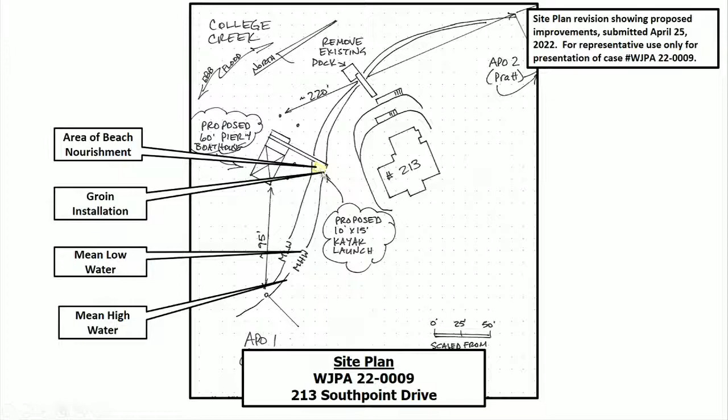This gives a better view. The house will be to the left. The area of beach nourishment is shown in the yellow area, steps down to the proposed pier, the kayak launch to the right, and then the sill installation above.

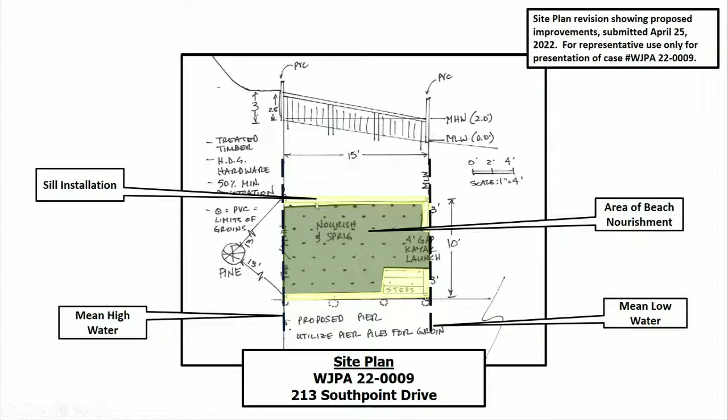Site photography looking down towards the area of work, the area of beach nourishment.

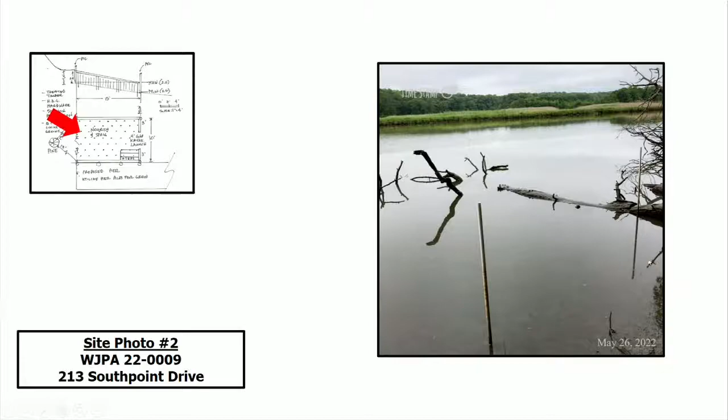As published in the Virginia Register on July 11, 2005, the revised Wetland Mitigation Compensation Policy and Supplemental Guidelines, Regulation 4 VAC 20-390-10, Virginia, as a Chesapeake Bay program partner, is committed to achieve a no net loss of existing wetlands acreage and function in the signatories' regulatory programs. In order for a proposed project to be authorized to impact wetlands and compensate for the wetland loss in some prescribed manner, the following 3 criteria must be met.

All reasonable mitigative efforts, including alternative siting, which would eliminate or minimize wetland loss or disturbance, must be incorporated into the proposal. The proposal must be clearly water dependent in nature, and the proposal must demonstrate clearly its need to be in the wetlands and its overwhelming public and private benefits. If the proposed project cannot meet one or more of the above criteria, the project must be denied or must occur in areas outside of the wetlands. Should it satisfy all 3 criteria, however, compensation for the wetland loss is required.

The sequence of acceptable mitigation options should be as follows: on-site, off-site within the same watershed, mitigation banks in the same watershed, or a payment of an in lieu fee. If compensation is required, it should be a condition of the permit.

Staff has reviewed this application and finds that this project meets the 3 criteria outlined above. There are no anticipated vegetated wetland impacts associated with this proposal, therefore mitigation is not a requirement of this permit. However, the applicant has already proposed the plantings of Spartina alterniflora as beach nourishment. Staff has reviewed the above application and recommends approval of the application as presented.

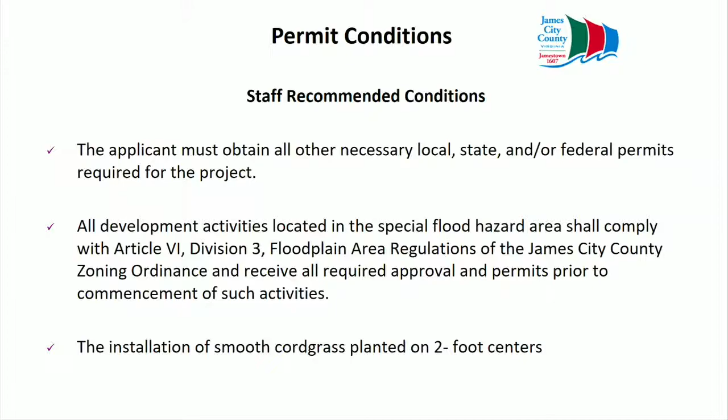The wetlands permit for this project shall expire on June 8th, 2025 if construction is not begun. If an extension of the permit is needed, a written request shall be submitted to the Stormwater and Resource Protection Division no later than April 27th, 2025, which is 6 weeks prior to the expiration date. If there are any questions, I'd be happy to answer them at this time.

I have a quick question. Could you restate, you said there was no vegetated impacts to the wetlands? Correct.

The application shows a proposed pier. I note that there is an existing pier. Are they just rebuilding the pier? Yes, one pier, the existing pier is going to be taken down and then a new pier built in this new position.

Questions for staff? Who is the contractor going to join us? Ms. Carla Havens? Who's the contractor? I do not know, sir.

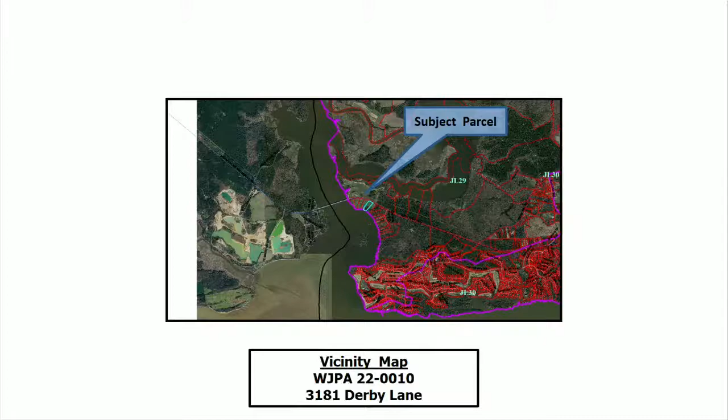Also existing on the property is a series of offshore breakwaters. The applicant is proposing an additional 12-foot by 55-foot breakwater landward of the most northern two breakwaters that will include approximately 3,600 square feet of beach nourishment and sprigging. This project is proposed between mean low water and mean high water. Therefore, this project must be heard by the Wetlands Board.

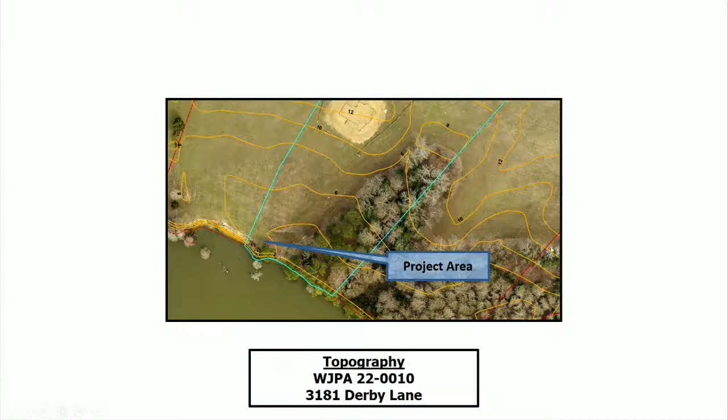A little bit of information about the site. Some topography for the proposed site and the floodplain. The site plan, as I was describing, this is the proposed breakwater. As you can see, there are a series of breakwaters existing on this site.

Area of rock is outlined here in yellow, with this square being the breakwater and the furthest one on your screen being the proposed revetment. The concrete wall that I was speaking of is just behind this proposed revetment. This concrete wall holds a patio area that is beginning to see structural failures.

In orange here is an area of beach nourishment. The contractor has agreed to sprig portions of the tombolo feature associated with the breakwater and leave areas as a natural or recreational styled beach as well. Mean high water is here in purple and in blue on this side of the breakwater system.

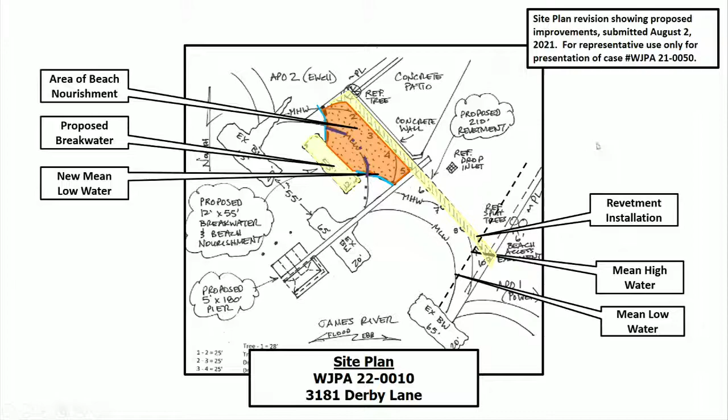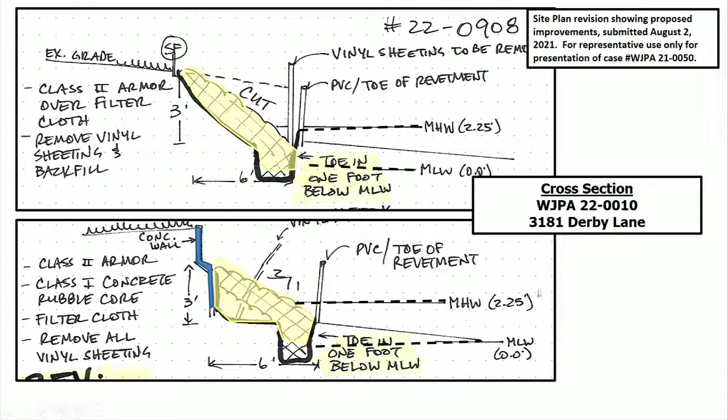In the area where the concrete wall nearly interfaces the existing vinyl bulkhead area, the revetment will come all the way up to the concrete wall. Here's a cross section of the proposed breakwater, and in yellow, and in green, the area of beach nourishment and sprigging.

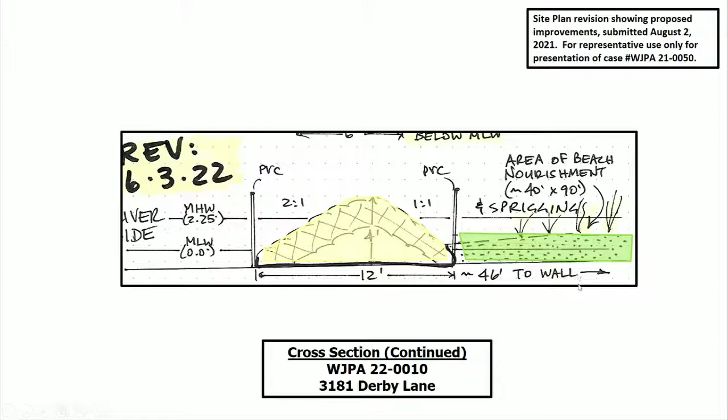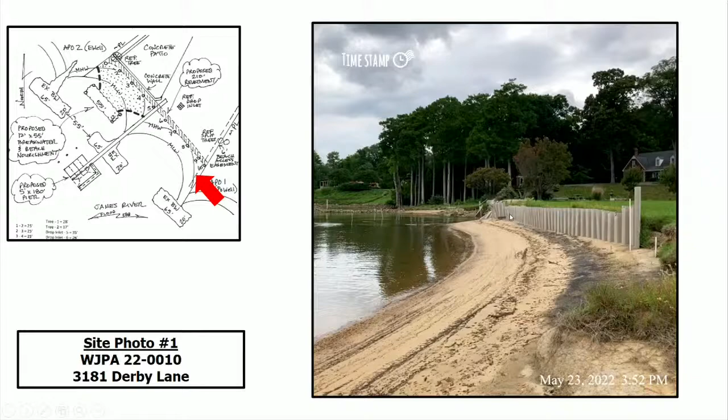A couple of site photographs. This is the existing bulkhead or vinyl wall. In this area, you can see where it is beginning to fail. A look out towards the existing two breakwaters.

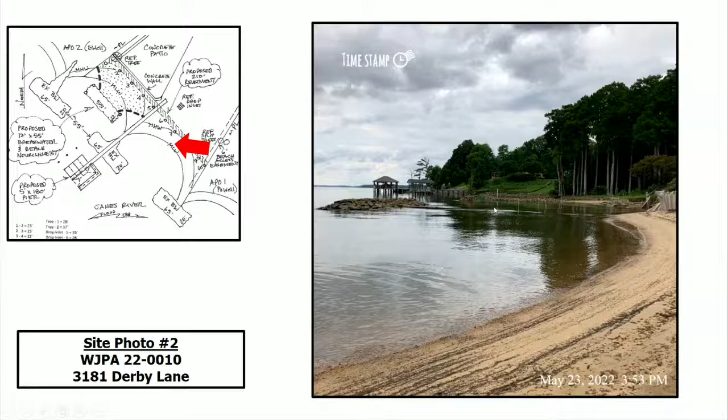This one is a little bit hard to see, but the new breakwater is proposed inland of the two, but in between the northernmost breakwaters. This is the area of revetment. As you can see, this portion of the property is experiencing upland erosion or shoreline erosion here. It's cutting in back behind the vinyl bulkhead and to adjacent property owners.

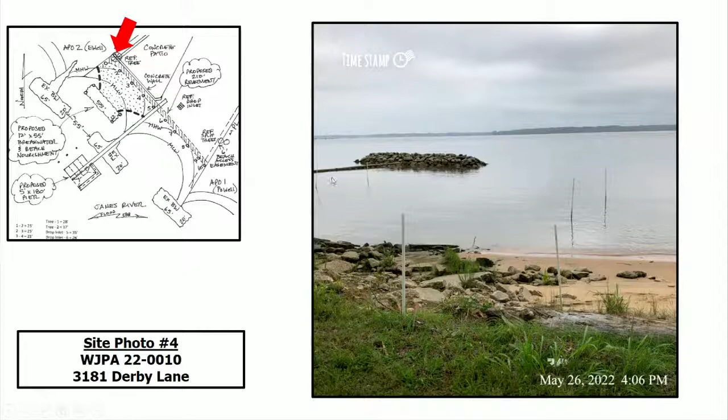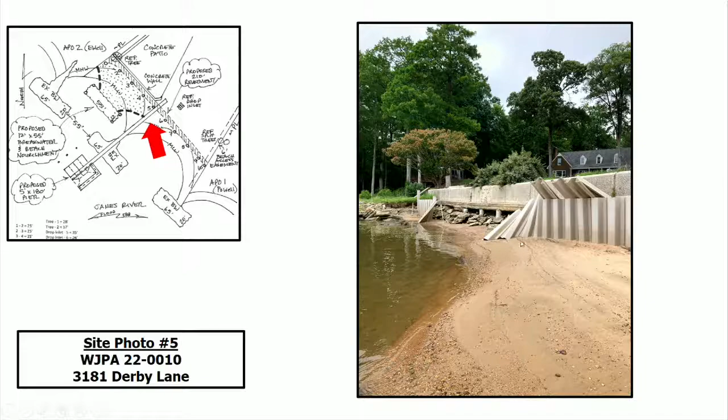Looking out, this is the area, these PVC pipes would represent the new breakwater. And the area in between these four would be where the beach nourishment will go with some sprigging. A good shot of the failure of the vinyl bulkhead and its exposure to the concrete wall behind it. There's a decently significant amount of threat to that concrete wall due to this erosion issue.

As published in the Virginia Register on July 11th, 2005, the revised Wetland Mitigation Compensation Policy and Supplemental Guidelines, Regulation 4 VAC 20-390-10. Virginia, as a Chesapeake Bay program partner, is committed to achieve a no net loss of existing wetlands acreage and function in the program and in the signatories' regulatory programs.

In order for a proposed project to be authorized to impact wetlands and compensate for the wetland loss in some prescribed manner, the following three criteria must be met. All reasonable mitigative efforts, including alternative siting which would eliminate or minimize wetland loss or disturbance, must be incorporated in the proposal. The proposal must clearly be water dependent in nature, and the proposal must demonstrate clearly its need to be in the wetlands and its overriding public and private benefits.

If the proposed project cannot meet one or more of the above criteria, the project must be denied or must occur in areas outside of the wetlands. Should it satisfy all three criteria, however, compensation for the wetland loss is required. The sequence of acceptable mitigation options should be as follows: on-site, off-site within the same watershed, mitigation banks in the same watershed, or a payment of an in lieu fee.

If compensation is required, it should be a condition of this permit. Staff has reviewed the application and finds that this project meets the 3 criteria outlined above. There are no anticipated vegetated wetland impacts associated with this proposal, therefore, mitigation is not a requirement of this permit. However, the applicant has proposed to revegetate the area of beach nourishment associated with the Tombolo feature with wetland plantings.

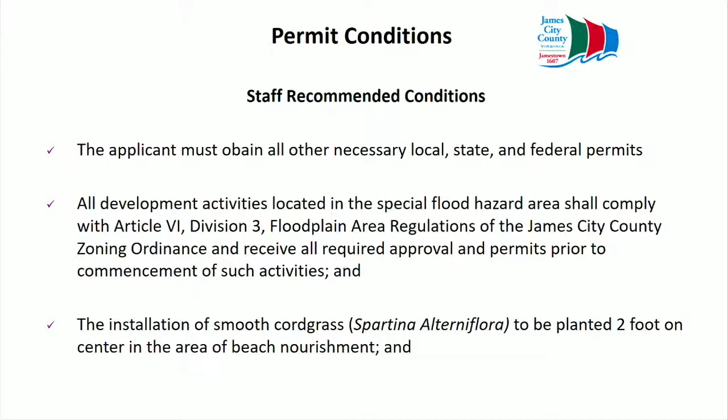That all development activities located in the special flood hazard area shall comply with Article 6, Division 3 floodplain area regulations of the James City County zoning ordinance and receive all required approval and permits prior to the commencement of such activities. That the installation of smooth cordgrass, Spartina alterniflora, or an equivalent wetland species be planted on 2-foot centers in the area of beach nourishment.

A surety of $300 be paid in place prior to the commencement of work in a form acceptable to the James City County Attorney's Office to guarantee the beach nourishment plantings. That this wetlands permit for the project shall expire on June 8th, 2025 if construction has not begun, and that if an extension of the permit is needed, a written request shall be submitted to the Stormwater and Resource Protection Division no later than April 27th, 2025, which is 6 weeks prior to the expiration date.

Thank you. Be happy to answer any questions the board may have.

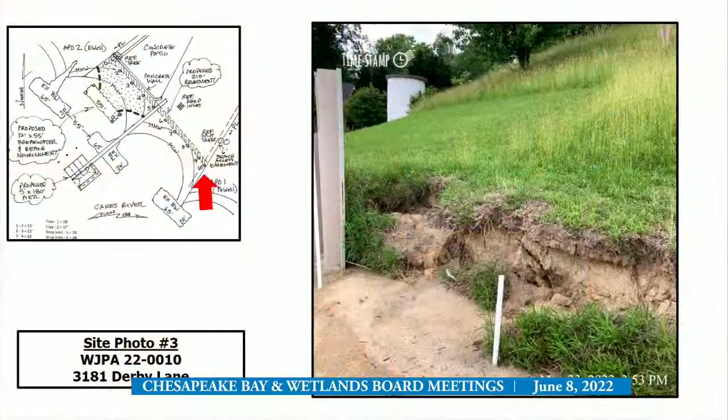Right now, the access is behind the bulkhead. I don't know if any of the residents are using it, because you can't use it — it's 4 feet high. So we have addressed it.

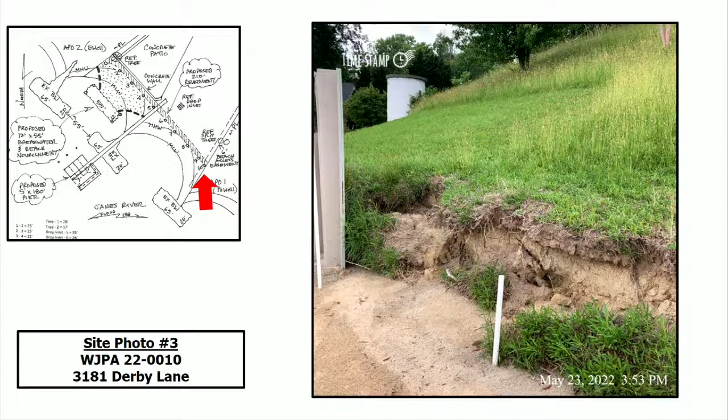I have staked it. I emailed the Ruggles, I emailed the Ewells, and I emailed the Powells. Those were the people at the group powwow we had on site, and I've not heard back from anybody. As far as I know, the Ruggles have not withdrawn their objection, but better access will be provided for the neighborhood clearly than what is out there right now.

So the intent of your plan is to maintain access for the local community? Yes, that is it — a 6-foot wide easement, and it will be worked into the 2-to-1 slope.

Instead of just placing the stones, we'll use flatter stones to make stairs. So it will still act as a revetment, but people will be able to step and walk down it like a set of steps.

Because right now, they're either going around the edge there, a 3-foot drop, or they're clambering over the vinyl bulkhead that has no cap on it and tearing themselves up.

Okay. And Mr. Kaisen has said he has welcomed the neighborhood to use his driveway. It's a much more hospitable way to get to the beach.

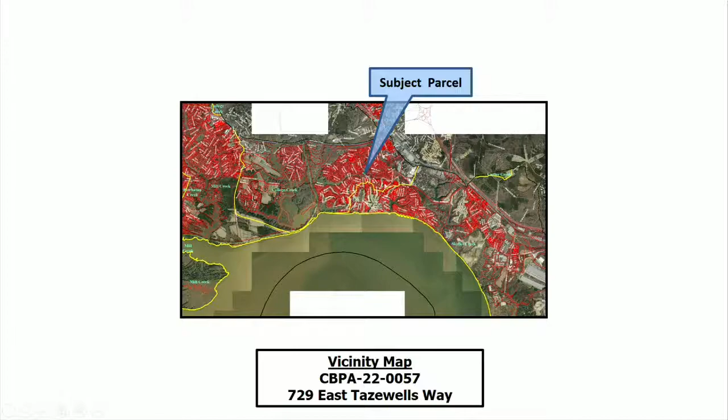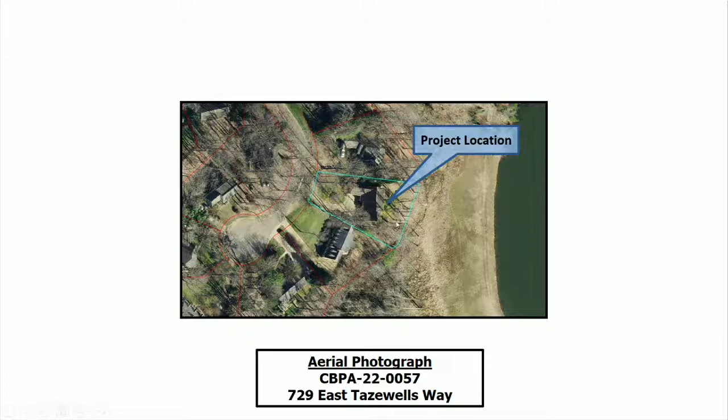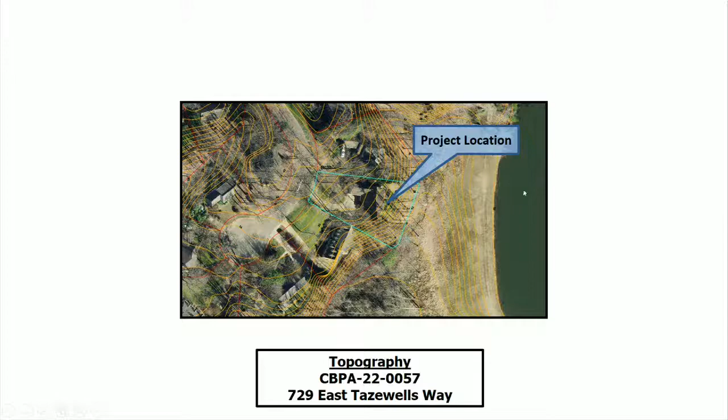An aerial photograph of the lot in question shows the deck being constructed to the rear of the property, and the topography of this lot. This ravine here will come into play in the next slide, where you see the floodplain, but more importantly, the resource protection area. There is a perennial body of wetlands coming through here, causing the resource protection area to encroach into the lot as heavily as it does.

The total lot size of this property is 0.43 acres, of which 65% is located within the resource protection area. On May 31st, staff from the James City County Stormwater and Resource Protection Division made a site visit to the applicant's home and found the proposed 793 square foot deck was already constructed prior to the approval of the Chesapeake Bay Preservation Waiver and a building permit. The existing deck includes 333 square feet of impacts to the landward 50-foot RPA and 460 square feet of impacts to the seaward 50-foot RPA.

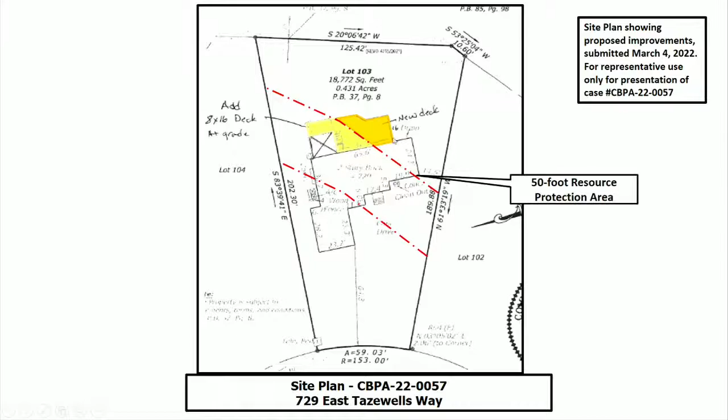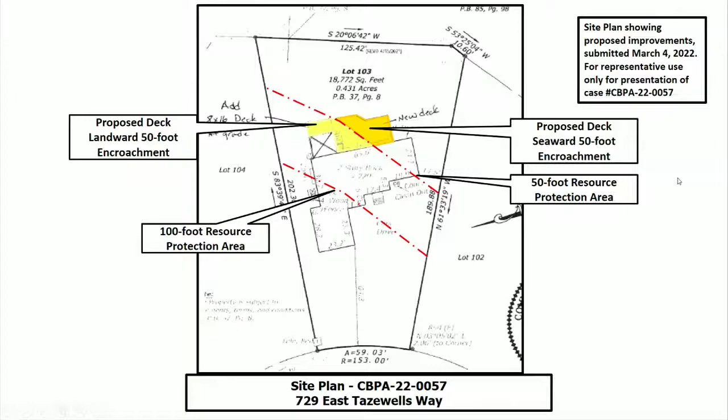On the site plan above, you can see the seaward RPA line and the 100-foot resource protection area. The two areas of impact are broken up into slightly different colors. The brighter area of yellow is the deck encroachments into the landward 50-foot RPA, and the deck encroachments into the seaward 50-foot RPA.

Should this exception request be approved, required mitigation for this amount of impervious impacts shall be doubled, equating to 4 planting units, which is 4 canopy trees, 8 understory trees, and 12 shrubs. Additional requirements associated with the after-the-fact exception request approval would include the payment of a surety that would correspond to this amount of mitigation, an additional permit fee of $300, mimicking the normal after-the-fact process, and an additional civil charge payment of $4,500 be paid prior to the issuance of a building permit.

Because this was constructed sometime between the application of the Chesapeake Bay Preservation Waiver and before its approval, the county deemed the degree of noncompliance to be in the major category. However, the water quality impact was deemed moderate based on violations we have experienced in the past. That is how we landed on this $4,500 civil charge.

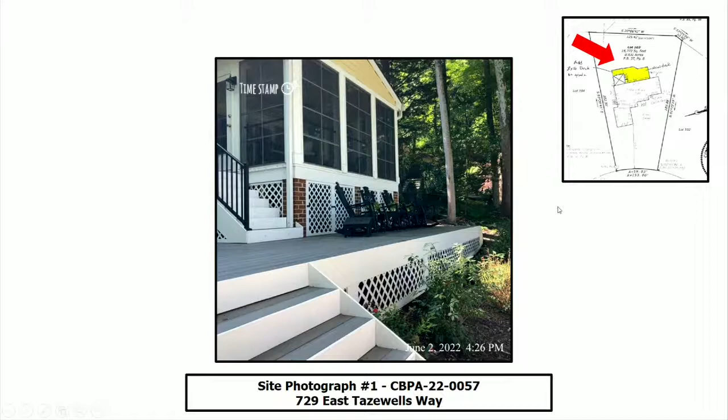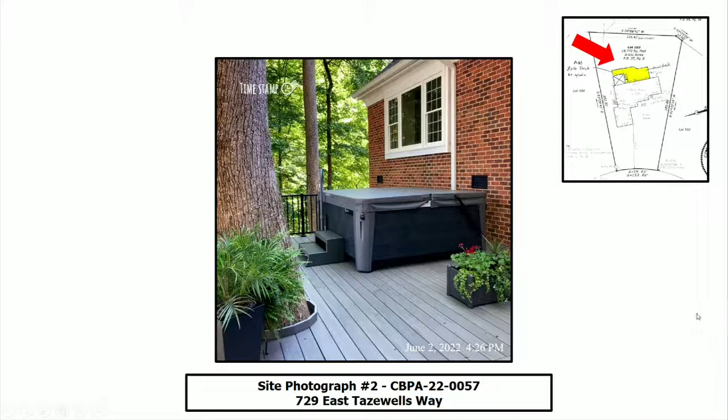Some site photographs of this deck. This is looking backwards towards the sunroom area. Standing on the deck, looking towards the opposite side. The deck and stairs, and the gravel underneath this deck, which would be a condition of this permit, which the applicant and contractor have already gone ahead and taken care of.

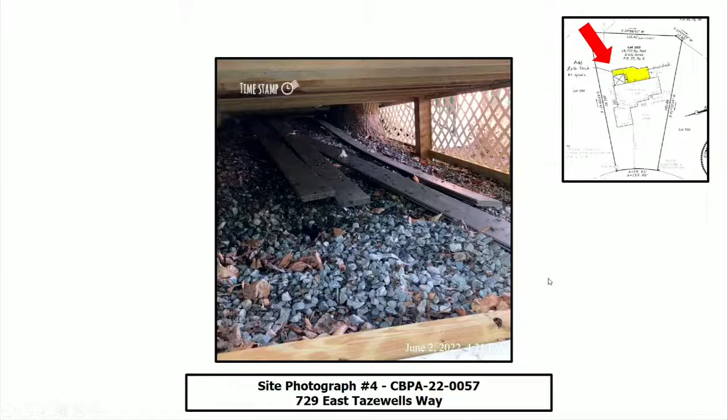Mitigation plantings that are already in place in some form or fashion. Over the past couple of years, it sounds like the homeowners have taken it upon themselves to revegetate the resource protection area, and staff will take that into consideration in some form or fashion.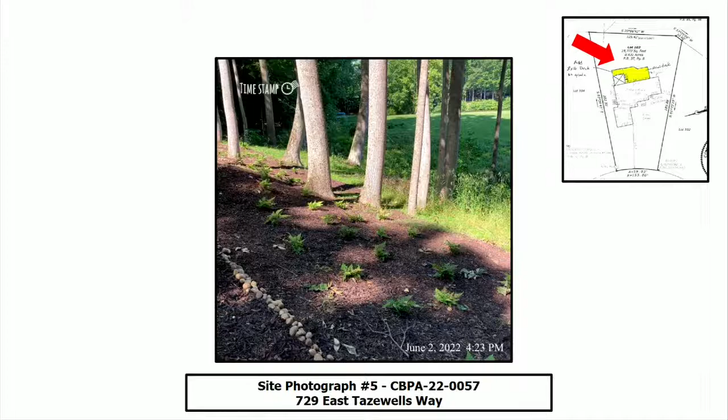Staff has evaluated the application and exception request for the construction of a deck. This application meets the ordinance conditions in sections 23-11 and 23-14 and should be heard by the board because the construction of a deck is considered accessory in nature. This exception request is also being heard by the board after the construction of this project.

The board may grant exceptions to section 23-7 if the application meets the following 5 conditions. The exception request is the minimum necessary to afford relief. Granting the exception will not confer upon the applicants any special privileges denied by Chapter 23, Chesapeake Bay Preservation of the James City County Code, to other property owners similarly situated in the vicinity. The exception request will be in harmony with the purpose and intent of Chapter 23 of the James City County Code and is not of substantial detriment to water quality.

That the exception request is not based on conditions or circumstances that are self-created or self-imposed, nor does the request arise from conditions or circumstances either permitted or non-conforming that are related to adjacent parcels. That reasonable and appropriate conditions are imposed which will prevent the exception request from causing a degradation of water quality.

Staff has reviewed the application and exception request and has determined the impacts associated with the proposal to be major for the proposed development. Staff recommends denial of this exception request and removal of the deck.

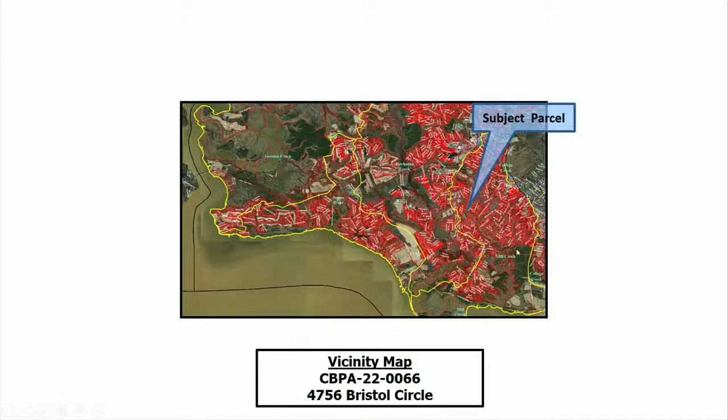Our next case is CBPA 22-0066, 4756 Bristol Circle. Good afternoon, Mr. Chair, members of the board. Robin Benedict, Watershed Planner. Mr. Michael Mann has applied for a Chesapeake Bay exception for encroachments into the RPA buffer for construction of a retaining wall located at 4756 Bristol Circle within the Westray Downs subdivision and the Mill Creek watershed. You can see the parcel in blue underneath this arrow and the Mill Creek watershed outlined in yellow. Here is aerial photography of the site, the project location at the front of the existing house, and topography at the site. The total lot size of this property is 0.48 acres, of which 98% is located within the RPA, so all but a sliver at the front of the property is RPA.

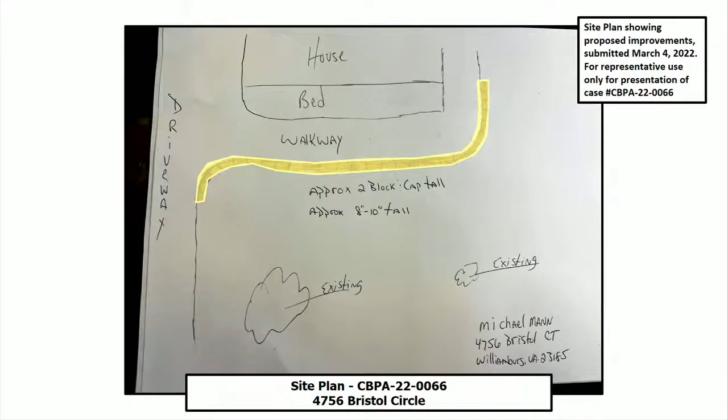The applicant is proposing to construct a retaining wall at the front of the house to help control erosion on the property. Total impacts to the RPA associated with this proposal equate to 52 square feet of impacts to the landward 50-foot RPA. Required mitigation for this amount of impervious impacts equals 3 shrubs. Here is the proposed site plan showing the existing walkway in front of the house and the proposed retaining wall. To put it in better perspective, here is the GIS overlay with the 50-foot resource protection area going right into the front of the house, the proposed retaining wall just in front of that, and the 100-foot resource protection area at the front of the house.

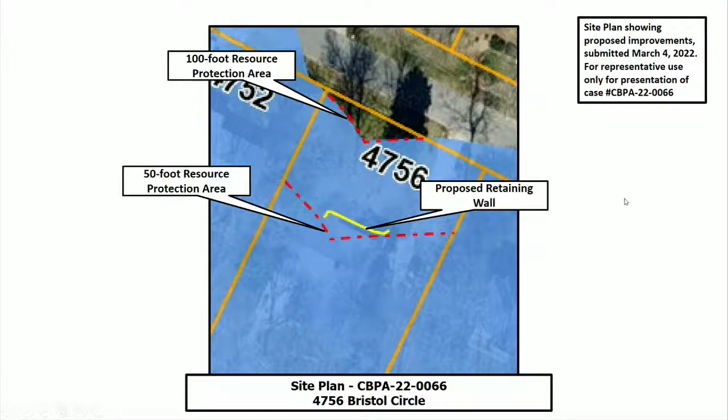Existing site photographs. In front of the walkway, currently there are a couple bricks, but that is the basic footprint of the proposed retaining wall. It loops back around towards the stairs at the front of the house, and it will continue down towards the driveway.

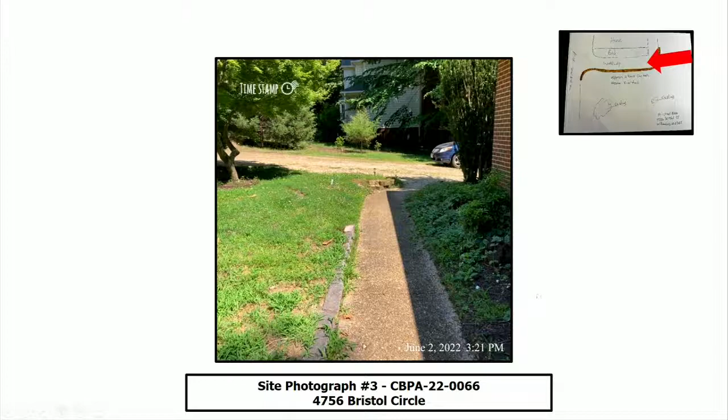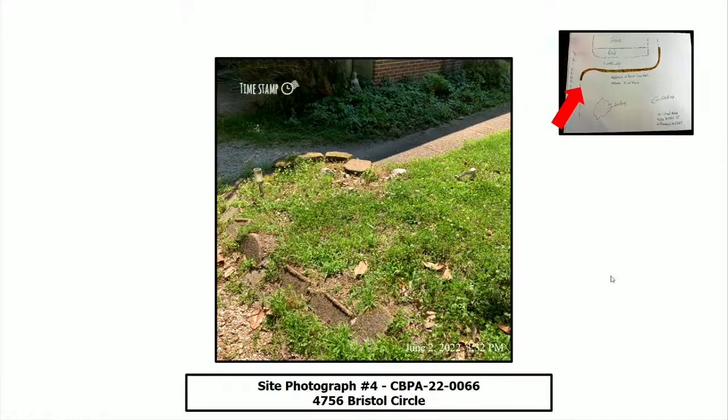This little knoll at the edge of the driveway will be straightened out and then curved back, so they'll lose this little bit of land. They say it's a bit of a safety hazard as it currently stands against that walkway. And here's the current condition of their front yard.

Staff has evaluated the application and exception request for the construction of a retaining wall. This application meets the ordinance conditions in sections 23-11 and 23-14 and should be heard by the board because the construction of a retaining wall is considered accessory in nature.

The board may grant exceptions to Section 23-7 if the application meets the following 5 conditions. The exception request is the minimum necessary to afford relief. Granting the exception will not confer upon the applicant any special privileges denied by Chapter 23, Chesapeake Bay Preservation, of the James City County Code to other property owners similarly situated in the vicinity.

The exception request will be in harmony with the purpose and intent of Chapter 23 of the James City County Code and is not of substantial detriment to water quality. The exception request is not based on conditions or circumstances that are self-created or self-imposed, nor does the request arise from conditions or circumstances either permitted or non-conforming that are related to adjacent parcels, and reasonable and appropriate conditions are imposed which will prevent the exception request from causing a degradation of water quality.

Staff has reviewed the application and exception request and has determined the impacts associated with the proposal to be minor for the proposed development. Staff recommends approval for this exception request, and if the board wishes to approve this request, staff recommends that the following conditions be incorporated into the approval.

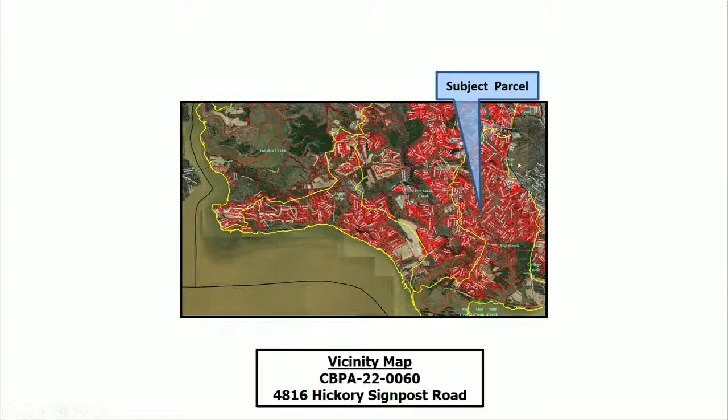You can see this property outlined here in blue. Again, the watershed boundary is here in yellow, and that is the Mill Creek Watershed. This parcel was platted in 1970 prior to the adoption of the Chesapeake Bay Preservation Ordinance in 1990. An aerial photograph of this property is outlined here in blue. The road runs, it curves around this property. So this property is the bend in Hickory Signpost with the wetlands running through and around this property as well.

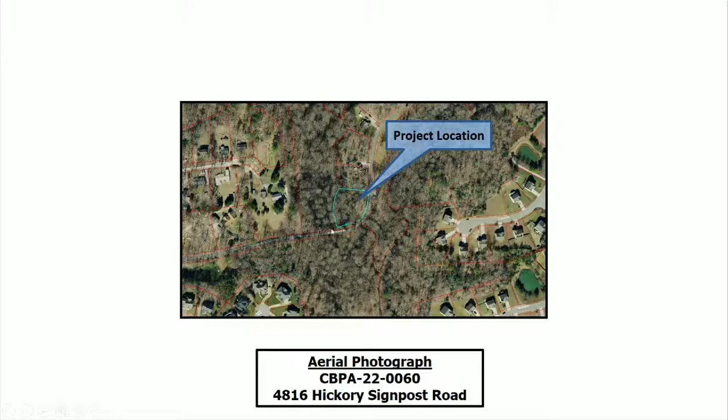The topography as this area is situated is very, very steep, dropping off to the actual wetlands. The wetlands themselves are very flat, very characteristic of streams with floodplain adjacent wetlands on them. And it's because of these wetlands that the resource protection area sits as it does on this lot. The total lot size of this property is 0.56 acres, of which 100% is located within the RPA.

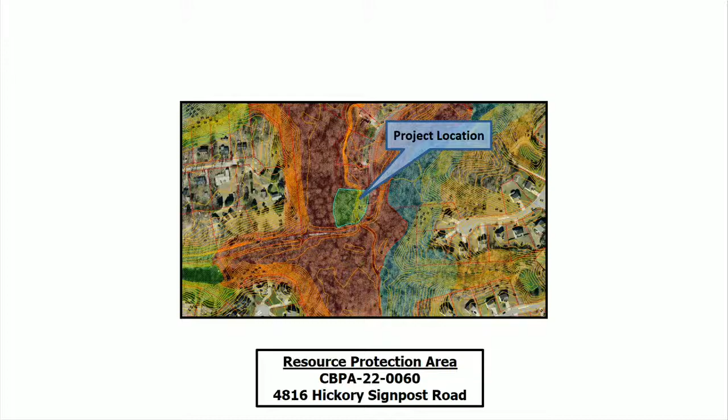The applicants gained approval from the Board of Zoning Appeals in May 2022 to move the building setback from 60 feet from the road to 30 feet, in an effort to move the dwelling farther from the wetlands. If this approval had not occurred, the house itself would more than likely be constructed within the wetlands.

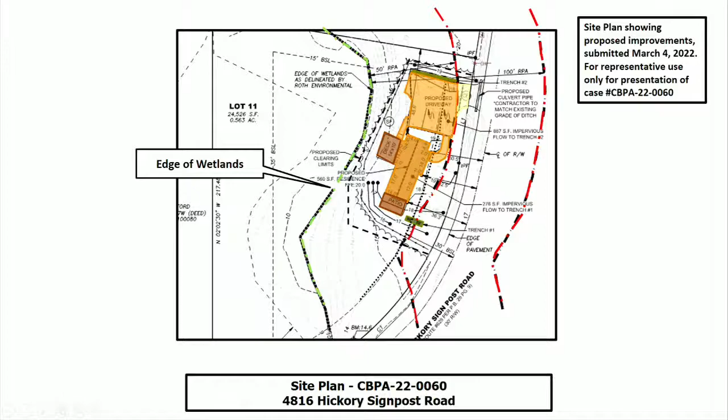On the site plan above, you can see these wetlands outlined here in green. The limits of clearing are this dash lined here. The 50-foot resource protection area here in red, and the 100 further out into the road. Seaward 50-foot house encroachments are outlined here in orange, and the accessory structures outlined here in the darker brown.

The proposed driveway encroachments that occur into the seaward 50-foot include 2 walkways that are coupled in with this number. And in yellow, you see the area that is outside or within the landward 50-foot RPA. So the majority of this lot is within the seaward 50-foot RPA, making pulling it out very, very difficult. The applicant has also included 2 infiltration BMPs to capture water quality and treat the runoff.

As I was saying before, this is the new 30-foot setback that is on this lot.

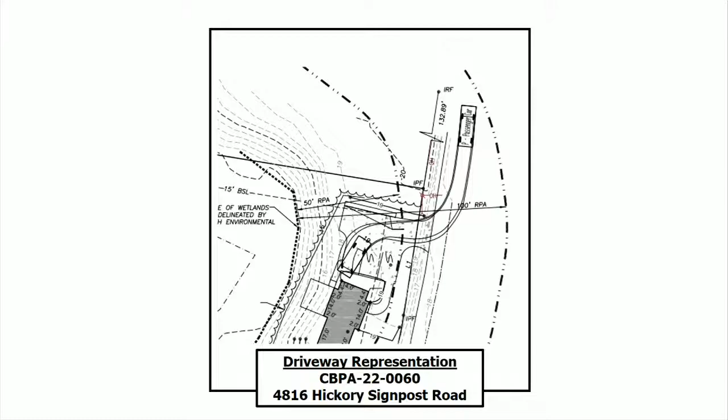The contractor also requested that we show this diagram regarding the size of the driveway. It is a large driveway, and there is no street parking due to the size of the road on Hickory Signpost. This is a diagram showing reasons why the driveway needs to be the size it is, in the words of the contractor, and a house diagram from the contractor as well.

Required mitigation for this amount of impervious impacts equates to 5 planting units, which is 5 canopy trees, 10 understory trees, and 15 shrubs. The applicant has verbally agreed to this and also proposed 2 additional infiltration BMPs on site. Staff has evaluated the application and exception request for the construction of a single-family dwelling.

This application meets the ordinance conditions in sections 23-11 and 23-14 and should be heard by the board because the construction of a single-family dwelling extends into the seaward 50-foot RPA.

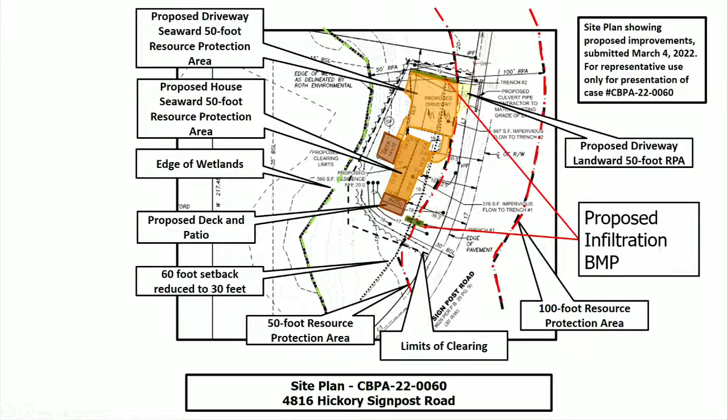I may add, we have copies of the plat, a full-size copy, if you need to refer to that.

Trevor, I understand this lot was platted over 50 years ago. Would this lot be platted this way if it came before the county today? No, sir. Generally, when lots or subdivisions are coming in for review for building, we would not allow a lot to be platted that would not have buildable area outside of the resource protection area. In fact, this lot was platted before the Clean Water Act. Yes, sir.

Within the area to be cleared, there are at least 2 canopy trees, is that right? And maybe a third, I don't quite recall. But yes, there are multiple canopy trees within that area.

So the mitigation units in this case, they're not necessarily going to be plantings on the site, but we'll defer to the contractor on exactly where the plantings go. However, based on my conversations with the contractor, we would be requiring the plantings to go back in some of these cleared areas in some form or fashion. We can substitute out things like canopy trees for understories or shrubs, to allow the proper growth of each site. I would say in this scenario it's unlikely that 5 canopy trees are going to fit and also thrive in that environment. Therefore, we would probably be working with the contractor to substitute many of these.

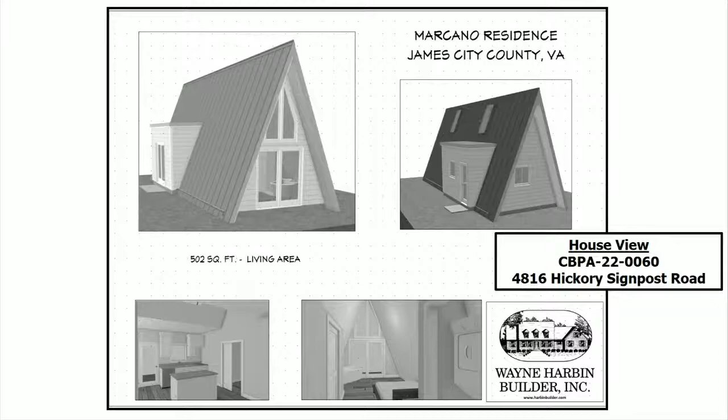Mr. Lukens, to address your question, we don't have a specific site-specific mitigation plan at the moment, but the entire lot is... normally we're kind of fighting for finding plantings within the RPA, but since the entire lot is within it, we'll be able to do, yes, 5 canopy trees will not happen on site, but a combination of a canopy tree or 2, some understories and shrubs can be planted around to help mitigate. And I'm sure with a handful of stuff going on the slope on the backside there, since that will need to be restabilized once it is cleared.

I think that kind of sums up everything I have. Happy to answer any questions you guys have.

Can you describe the construction of the trenches there?

Yeah, so, to Mr. Gussman's point, if you have a printout of it, if you want to flip to the other side, there's actually a detail of those infiltration trenches. They're basically stone trenches that the water gets routed to. They have catch basins in the top of them, depending on how big they are, depends on how many catch basins are placed in the infiltration trenches. Water can go in through the surface as well as through the catch basins into the stone and then into the ground, and infiltrates into the ground.

So the whole front half of the house is being directed there, and then the entire driveway is being directed to one along the driveway. So with now being able to also route the water off the back of the house over to the side, a majority of water that's going over that slope right now is going to be directed elsewhere and away.

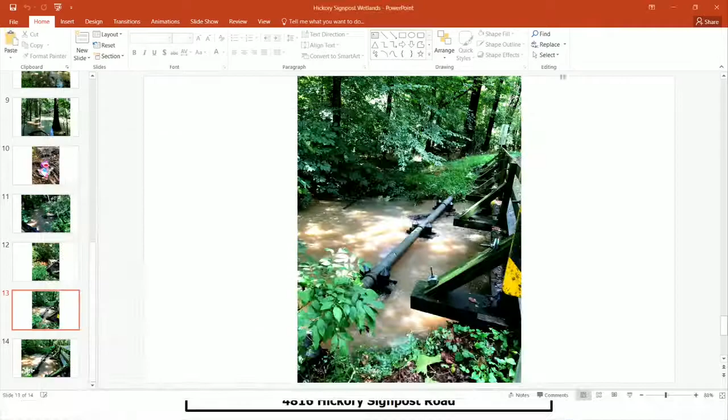I can't believe that we can't undo a mistake that was done 52 years ago. Why are we living with this mistake and saying it's okay to build because somebody didn't pay attention to a map that clearly showed it should have been designated as wetlands? That map is already part of the board hearing that was already mentioned, the setback ordinance hearing, so that's part of public record. So the 2018 legislation saying they needed to recapture more wetlands—this is 0.5 acres of wetlands that we could attribute towards that goal of reclaiming more wetlands.

So I don't know what you guys can legally do, because I know it was platted, or whatever the word is, prior to the Chesapeake Bay Act. But if there's anything you guys could do to deny this build, I would really appreciate it. Thank you for your time.

I have a question for you. Did you say you're the house next door? Yes, and I just want you to notice that the pictures I took were over a lot of different time. I've been fascinated by the wetlands ever since I've lived there. It's a really cool place, and I would just hate to see it be destroyed by a building.

I have a question, since you've lived there for a while, I assume. When it rains, is there a lot of water coming down the street? Is the water going over this property? Yes, the water comes down the street. My driveway is often in water—I have a gravel driveway. So the water coming off the street's also flowing across this property? Yes, and it flows across my driveway as well. Thank you. Any other questions?

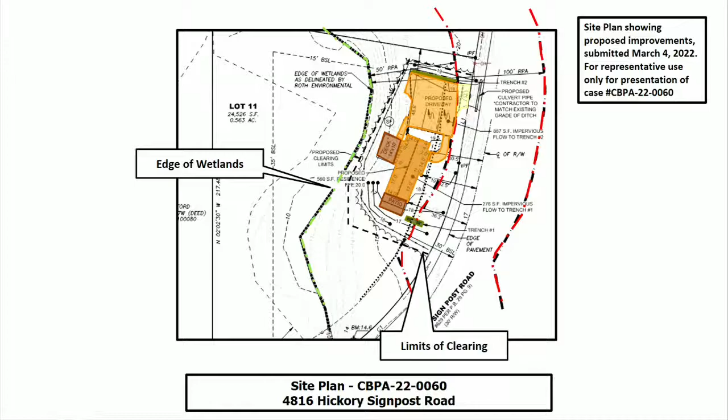Mr. Chairman, this is a tough case, and I recognize that the lot was platted before the Clean Water Act. Back in 1970, they could have built a house on this lot out in the middle of the swamp if they wanted to, and they wouldn't have needed a permit. But it's not 1970, and the amount of encroachment into the RPA, I think, is significant. It is my opinion that this exception request is not in harmony with the purpose and intent of this chapter and poses a substantial detriment to water quality.

Therefore, I will not be supporting the application. I concur with Mr. Rodley's assessment. Even though it was platted before the act, the soil type doesn't really allow for good infiltration. The distance from the construction to the wetlands is so small that I find it difficult to believe that at some point it's not going to impact the quality of the wetlands. I think this lot is unbuildable, I don't know how they could. I think the mitigation cannot be done on this property to offset the impact here, and really feel that the purchase of mitigation units to be applied elsewhere would not be equivalent to the environmental impact.

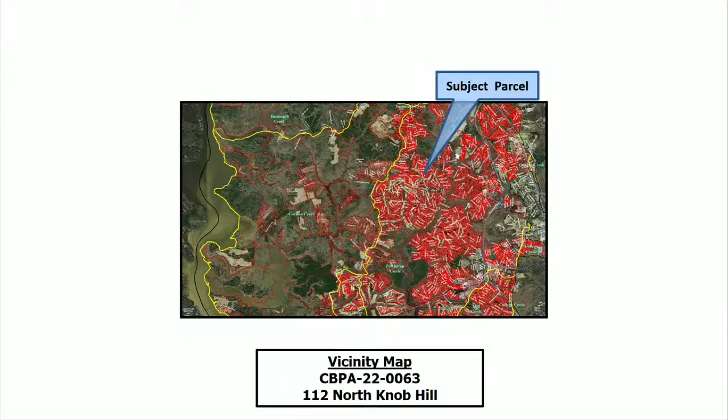The parcel was platted in 2005 after the changes to the Chesapeake Bay Preservation Ordinance in 2004. The total lot size of this property is 1.01 acres, of which 93% is located within the RPA.

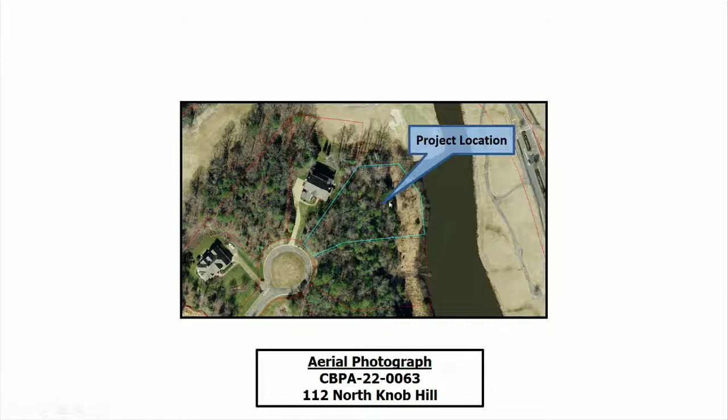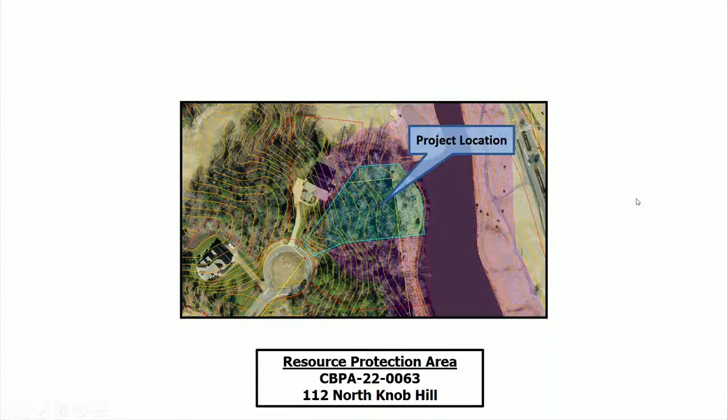Here's aerial photography of the project location, the topography as it affects this lot, sanitary sewer line shown in yellow across the back of the lot, the RPA shown in purple.

The applicants are proposing to construct a new single-family dwelling with a deck and patio. Total impacts to the RPA associated with this proposal equate to 2,552 square feet of impacts to the landward 50-foot RPA and 3,496 square feet of impacts to the seaward 50-foot RPA, for a total of 6,048 square feet of impacts.

Required mitigation for this amount of impervious impacts equals 16 planting units, or 16 canopy trees, 32 understory trees, and 48 shrubs. The applicants have proposed to plant 8 planting units, or 8 canopy trees, 16 understory trees, and 24 shrubs, and pay the remaining 8 credits in the amount of $4,000 into the Chesapeake Bay Mitigation Fund.

Here's a proposed site plan. You also have a paper copy in front of you.

Here's the edge of wetlands, so 2 wetland systems exist on this property. The 50-foot resource protection area and the 100-foot resource protection area shown in red.

The area of the house within the seaward 50-foot RPA shown in orange, and the area of the house and the landward 50-foot RPA shown in this lighter yellow shade.

The area of the driveway within the seaward 50-foot RPA, again in that orange color, and the rest of the driveway in the 50-foot landward RPA.

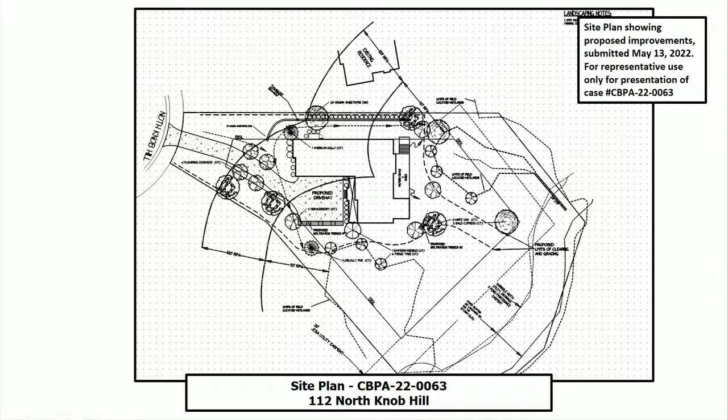Staff has evaluated the application and exception request for the construction of a new single-family dwelling. This application meets the ordinance conditions in sections 23-11 and 23-14 and should be heard by the board because the construction of this single-family dwelling extends into the seaward 50-foot RPA.

The board may grant exceptions to section 23-7 if the application meets the following 5 conditions. The exception request is the minimum necessary to afford relief. Granting the exception will not confer upon the applicants any special privileges denied by Chapter 23, Chesapeake Bay Preservation of

the James City County Code to other property owners similarly situated in the vicinity. The exception request will be in harmony with the purpose and intent of Chapter 23 of the James City County Code and is not of substantial detriment to water quality.

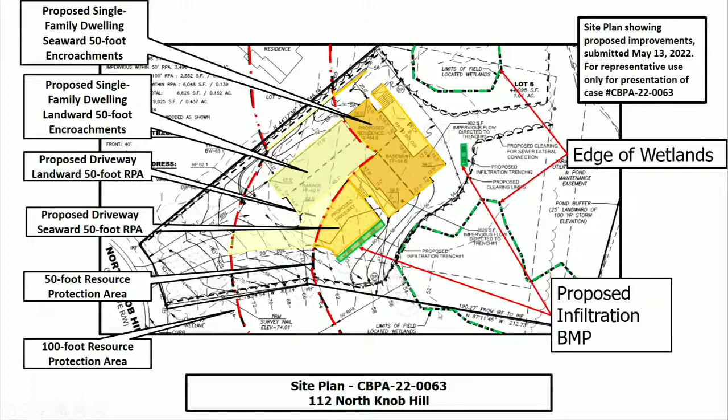So how far is that lower wetlands from the house property? What's the distance between the edge of the house and the edge of the wetlands? I don't have the scale shown on this picture, but I'll defer that to the contractor, and he may be able to give a rough estimate. Thank you.

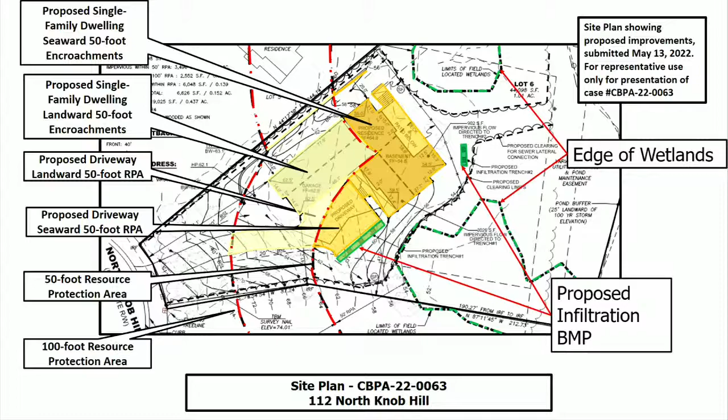Any other questions for the staff? These wetlands, what hydrologic source are they associated with?

Mr. Long, do you have an answer? Mr. Grogg was trying to find documentation on that, so if he was able to find that documentation, I'll allow him to speak to that. There's a BMP just off to the right of this image, is that correct? I believe so. Yes, there is indeed a BMP adjacent and behind this lot.

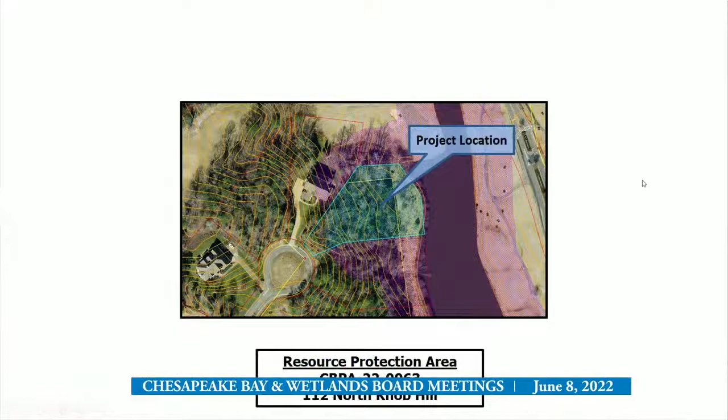So that water body on the right is considered a BMP? Yes, sir. And then actually on the lot there are connecting contiguous wetlands that feed into that BMP, pushing the resource upwards. Go back to the plat.

Refresh my memory, the sewer easement - I see a variable width utility drainage for the pond, and then you've got the dashed line, which I think is the path of the sewer. Is that correct? Looks to be about an inch wide, going north to south. Yes, that would be the sewer line. And it takes a jog and goes to the left? Yes. Heavily constraining the lot? Yes, sir.

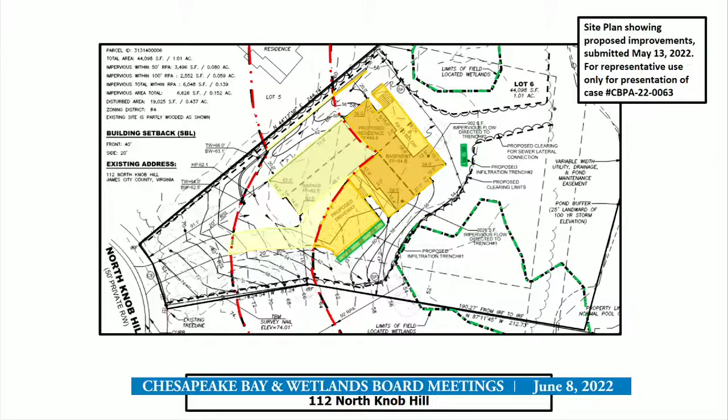Well, I'll ask a question some are probably thinking about: if you made that a 2-car garage, does that help move the structure out of the seaward 50 foot? It's not going to move it out of the seaward 50 feet, because reducing the garage you're only gaining probably 12 feet. That's a decent number, but you're still going to have direct impact on the right side. It would reduce some impact on the back, but we have to clear back there anyway to get to the sewer lateral. So the savings would be in that back left corner, but otherwise there's not going to be much difference from making it a 2-car garage.

I know there was a question about the driveway apron. Obviously you're not going to be able to back out of this whole thing, so it's kind of about maneuverability to get down there, maneuver, and get back up the driveway, because that's a long way to reverse uphill.

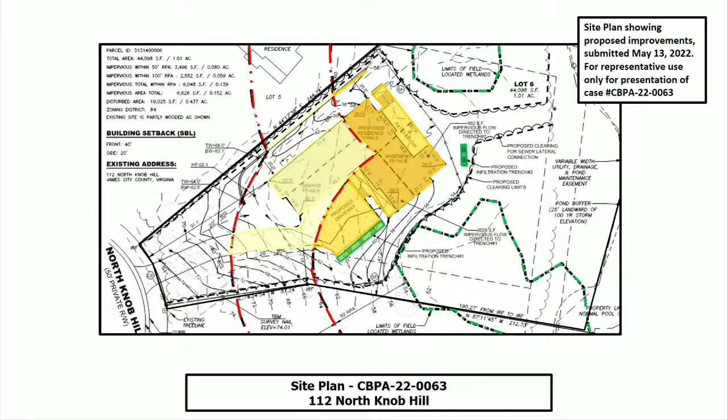I don't understand why if you reduce it by one garage bay, why you can't pull the full structure. The whole structure would pull forward, but your numbers within all of the areas are not going to change greatly.

They'll change by 336 in impervious, looking at the site as a whole - just impervious within the resource will be 336. The exact deviation between the landward and the 50 is slightly different, but on this particular lot, it's all draining to the back. So in the resource you will reduce 336 square feet, but that's the quantity I can give you.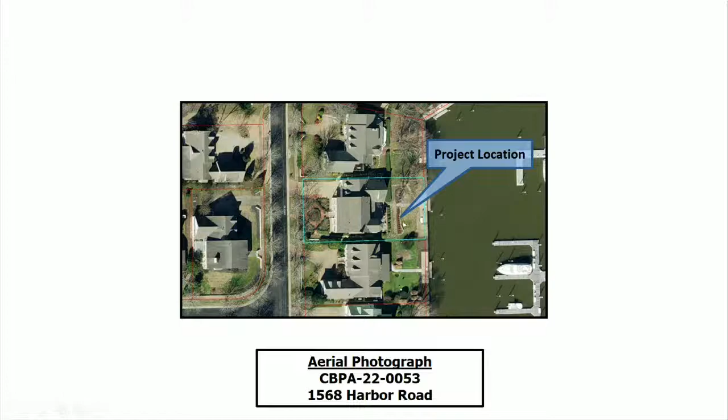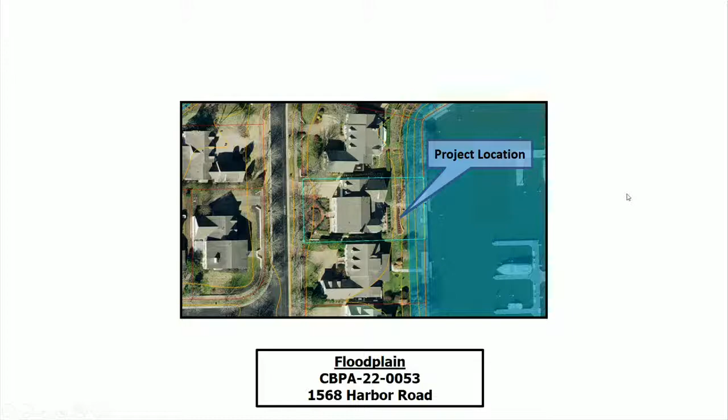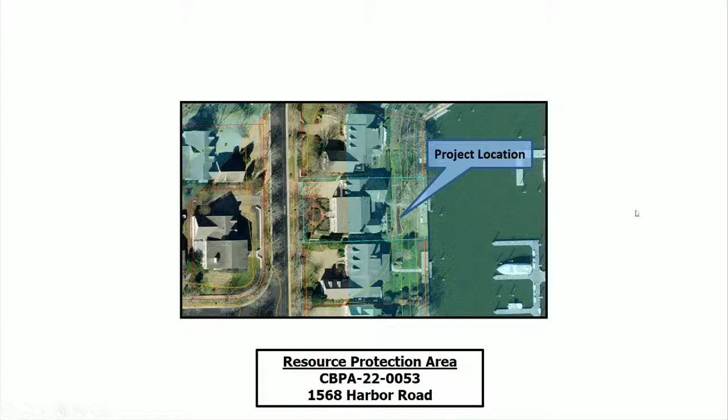The topography at this site, the floodplain as it affects this lot, the conservation easement which comes up to the back of the house, and the resource protection area shown in blue which comes up through the middle of the house. Total impacts to the RPA associated with this proposal equate to 45 square feet. This project will also encroach on conservation easement located behind the house.

Under normal circumstances, required mitigation for this amount of impervious impacts equals the planting of 2 shrubs. Because this exception request is being heard before the board after the fact, staff would require double mitigation units equating to 4 shrubs. The applicants have already planted 4 shrubs, therefore meeting county requirements.

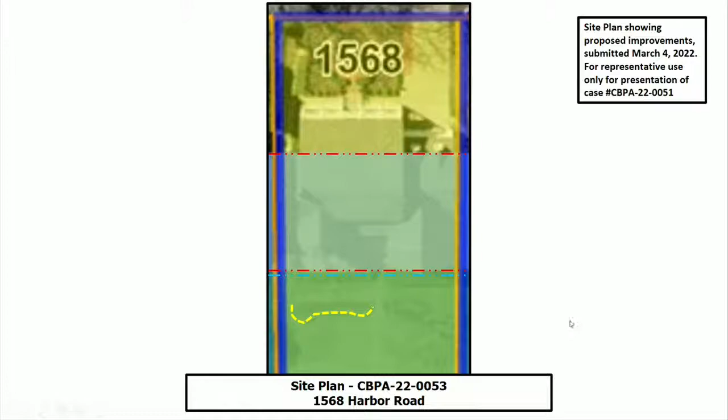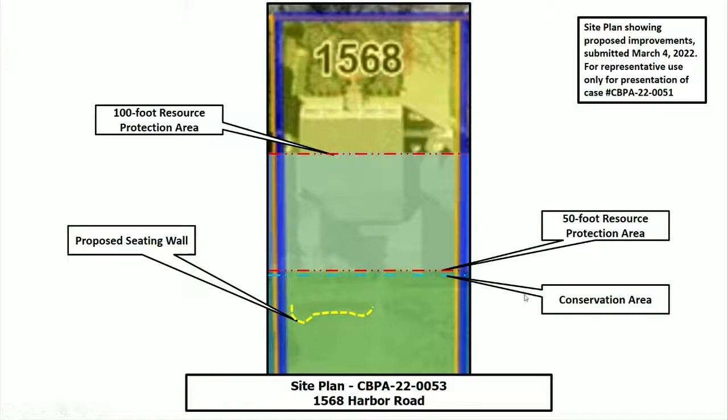In this site plan, used to better show you where the RPA lies on this lot: the 50-foot resource protection area shown in red, and the 100-foot resource protection area through the middle of the house shown in red, the proposed seating wall outlined here in yellow, and then the conservation area pretty equivalent with the 50-foot resource protection area at the back of the house.

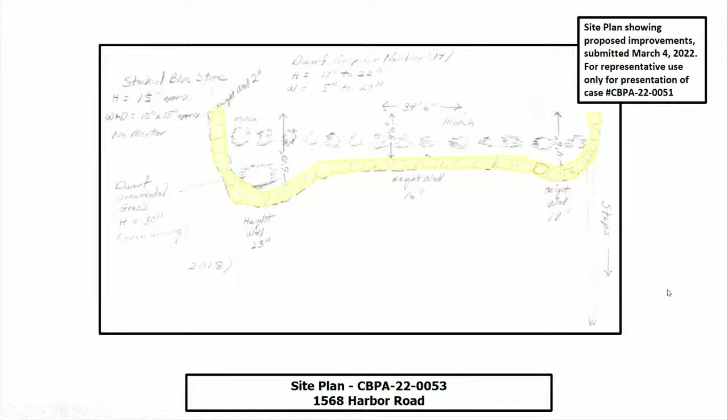Staff has evaluated the application and exception request for the construction of a seating wall. This application meets the ordinance conditions in sections 23-11 and 23-14 and should be heard by the board because the construction of a seating wall is considered accessory in nature. This exception request is being heard by the board after the initial construction of the project. The board may grant exceptions to section 23-7 if the application meets the following 5 conditions.

The exception request is the minimum necessary to afford relief. Granting the exception will not confer upon the applicants any special privileges denied by Chapter 23, Chesapeake Bay Preservation of the James City County Code, to other property owners similarly situated in the vicinity. The exception request will be in harmony with the purpose and intent of Chapter 23 of the James City County Code and is not of substantial detriment to water quality.

The exception request is not based on conditions or circumstances that are self-created or self-imposed, nor does the request arise from conditions or circumstances either permitted or non-conforming that are related to adjacent parcels, and reasonable and appropriate conditions are imposed which will prevent the exception request from causing a degradation of water quality.